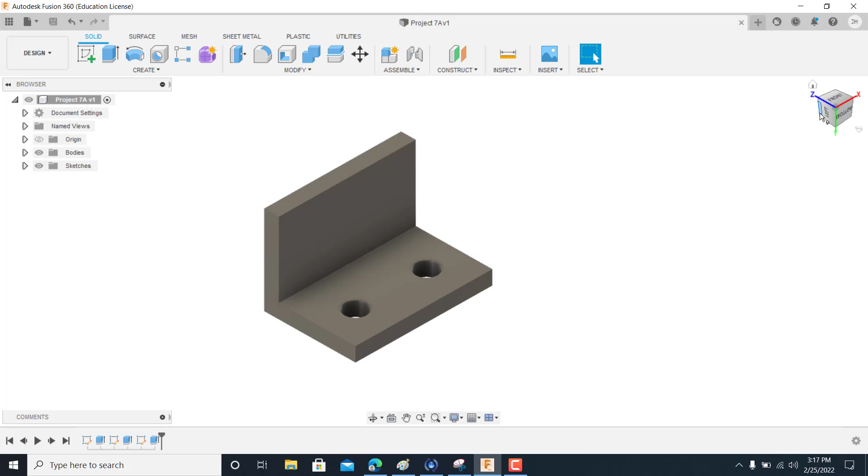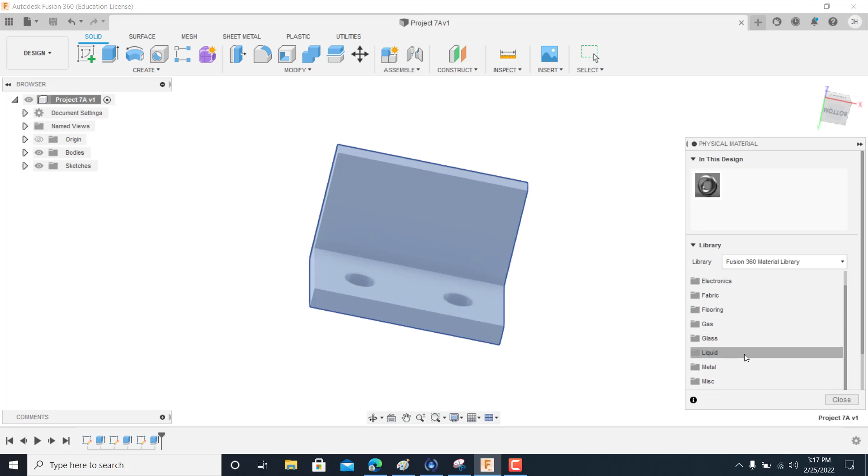First thing I want to do is make this one just out of ABS plastic, okay? So I just come up here and right click on Project 7A. That's what I've called it after I saved it. And we'll come down here to physical material. And in this part is where I go in and I find my ABS plastic, and put it right over top of that. And that is there. I want to hit save. Okay.

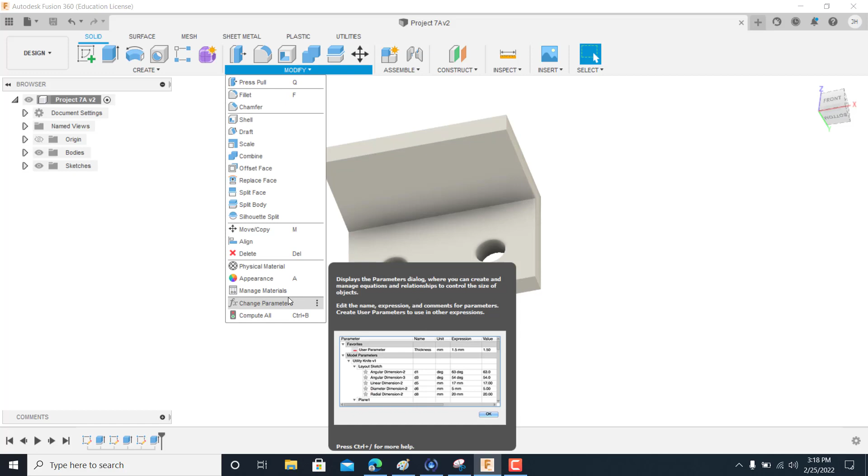Now, anytime you make an update to your project, let's say for instance you had done an analysis on this and it didn't withstand the pressure, and you want to change the material on it, you'll have to come up here and hit modify. Well, I didn't make enough of a change on it to do an update, but go ahead and hit compute all. That works with our analysis here in simulation. So anything you do, you need to hit compute all to change it, okay? It just changes the parameters in the design.

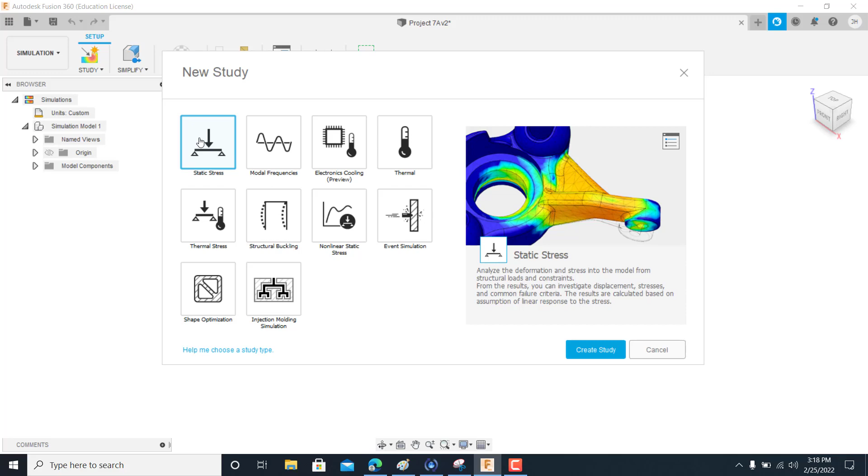So now I want to switch from my design over here on the left down to simulation. And inside here, we're going to just do static stress. That's all we're working with is statics. And on this part, I'm going to put some pressure on it, okay? But first, I'm going to lock it down. So I got the material. The first thing's taken care of. The next thing is to come in here and put a constraint on it.

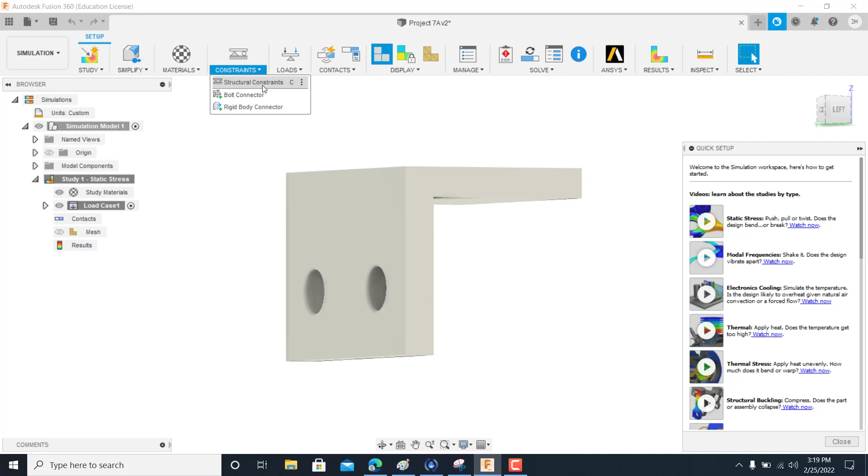So go to structural constraints. Now, you've got different ones. We could use pin if you wanted to, and I'll show you that. You just come in here and it's like it's pinned. Now, if you put that pin constraint in there, it won't move from side to side, but it will rotate. Okay, if you put another pin in it, it won't rotate.

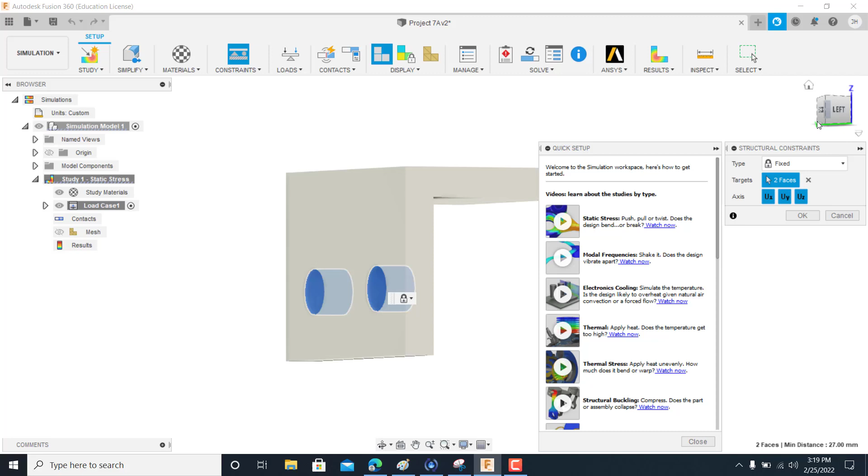But for what I'm going to do, I want to do fixed. Okay, on both of those, I just want to constrain it straight in. And let me cancel that out. Let's see if that's stuck.

All right. So to tell what's going on, this is study 1 that we've started out with. And loads constraints. So no, it didn't save my constraint. So I've got to go back in there and do it again. I'm just going to use a fixed constraint, and I'll click on that, and then I'll click on this one, and then you have to hit OK on that.

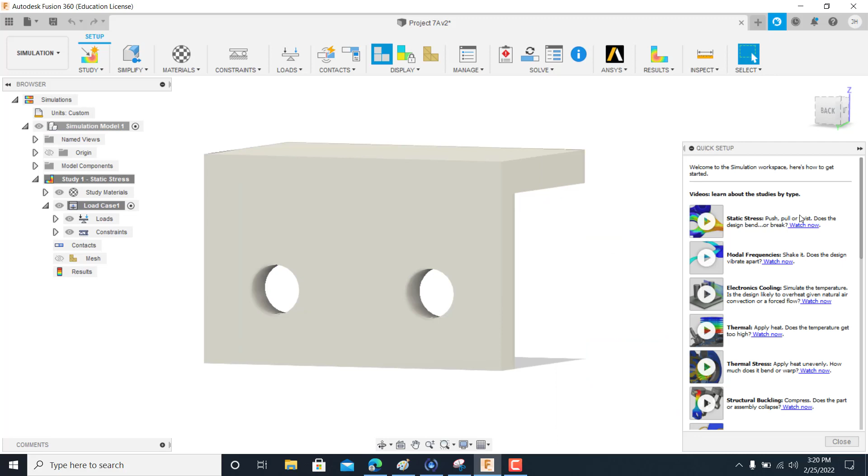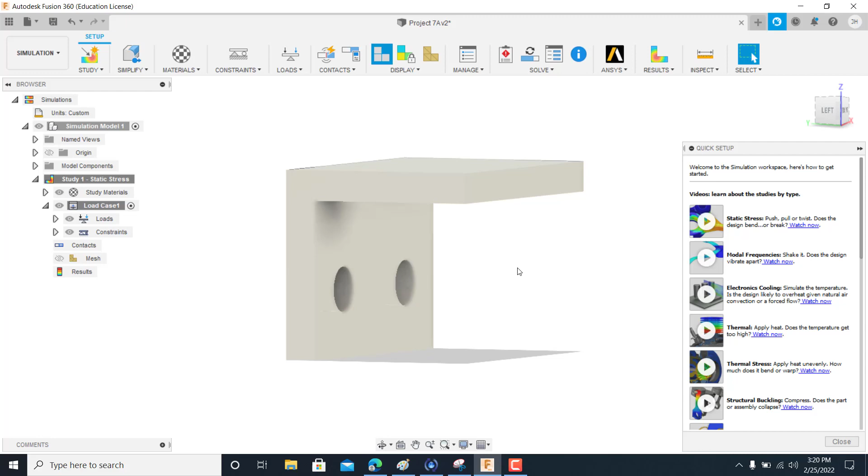So my constraints, I'm locked. Y'all see that? So I'm locked. And the reason I wanted that is I just didn't want this thing to uplift as it's being pushed on, okay? Now, the next project you do in 7B, you will be using pins in that, okay? So that's how you do the differences in them.

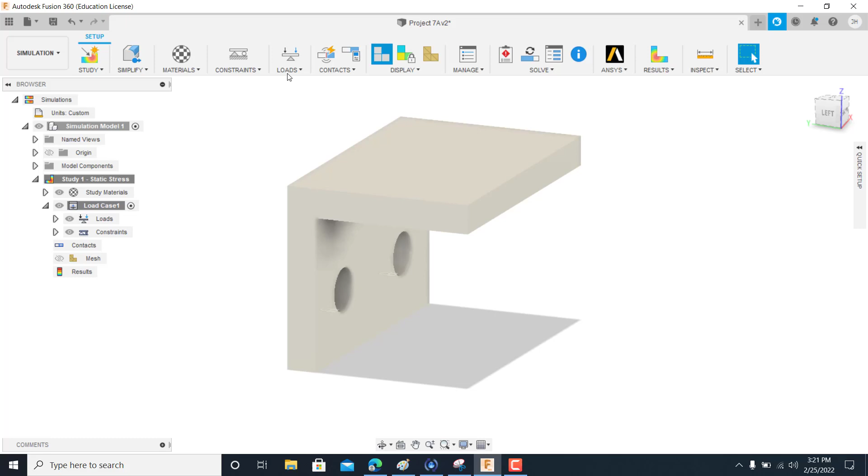So now, with that done, let's put a force on this. We're going to put 1,200 newtons on this, which is equivalent to about, you did the calculations the other day. What was it, around 270? I'm just guessing, around 270 pounds. So we're going to put about 1,200 newtons on this, and it's right here in loads, structural loads. All I do is hit the face of this and put 1,200, and OK.

Y'all see that? So this thing is all ready. You all see it over here. I've got my loads. If you right click it, everything should be, if I click on this, you can see the force. I can edit it by clicking on it anytime I want. Same thing down here with constraints. I can click on it and I can change those at any time. So that's the beauty of using parametric modeling software.

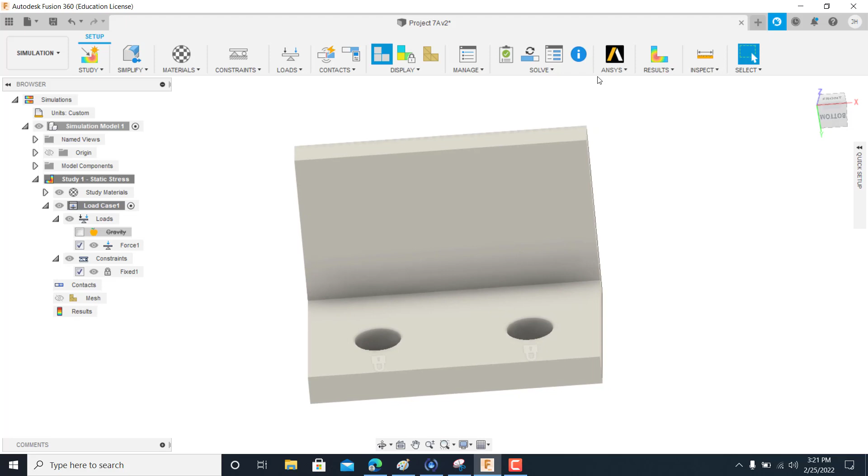So we are ready. Come up here and check and make sure you got everything correct. The study setup has all the information required, and when it does that, I can go over here, results, structural results. Well, I could have hit analysis there too, but I hit yes, and I'm going to solve here for this, okay? So let's see what's going to happen, all right?

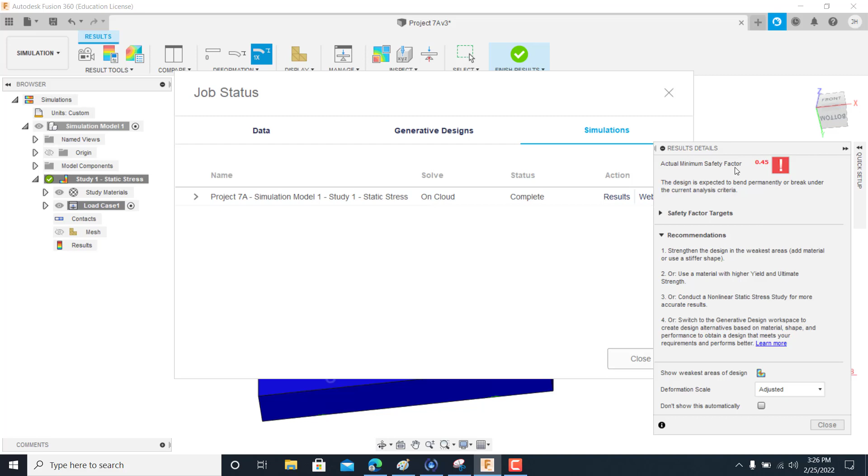Okay, the study is complete, and if you look, I got a 0.45. I'm in the red, so there's something that happened. Oh, wow. Check it out. Like I said, you don't want a whole lot of blue, but you don't want red, and you don't want a lot of yellow. You want to be more around the green to yellow, a little yellow, but you don't want a whole lot of blue.

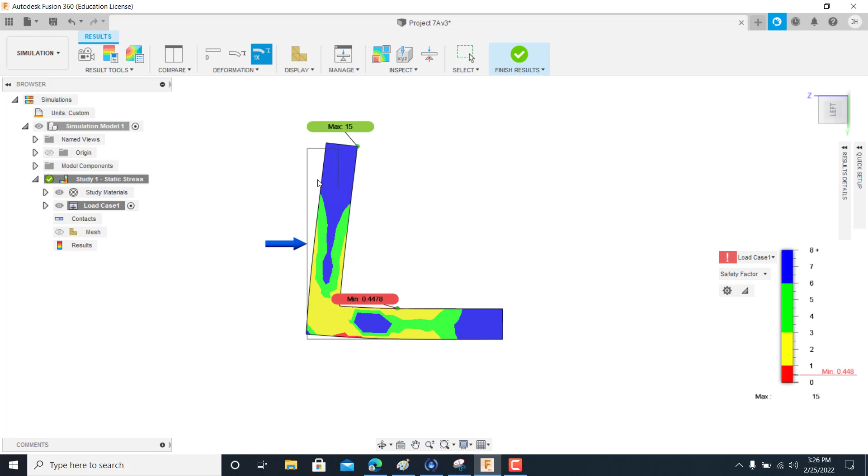But you're noticing this. Check this out. That pressure is being applied. Look how much this is bending from the pressure. And ultimately, when it gets to that point right there, it's done, okay? It's going to fail. So right here we see some major problems. And like I said, you need to be up close to around that 3 mark, okay? That's where we like to be.

So what we're going to do is we've got to go in and redesign this thing. We're trying to cut out a lot of material that we don't need, like this blue section up here. And down here, we don't need all this blue. But there is a requirement for length out here, but we could cut into it. We can cut into this too. We could add a few stiffeners in here for this little section. A fillet would be great right here, and maybe some extra material here. Whatever you see fit to make this thing better, that's what we've got to do.

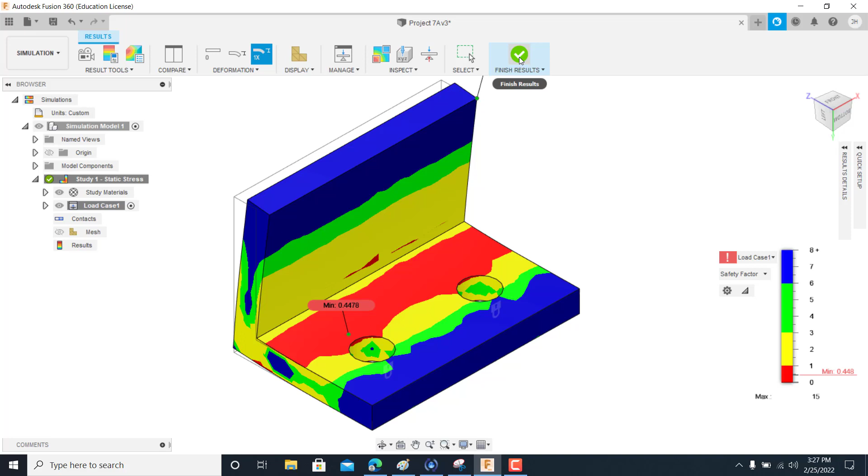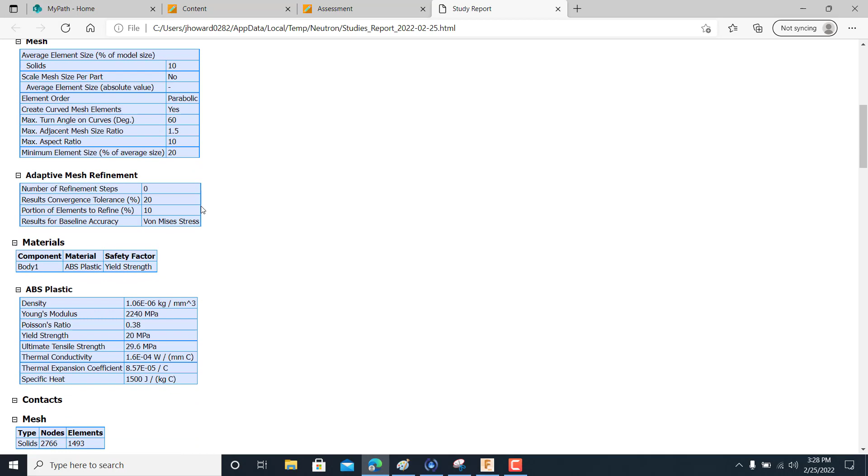So I want to finish the result, and also I want to go back to the study right here, and I can look at the report. Right here it is. And I want to look at the report, and this is what I want you guys to take some snipping pictures for me. Take a couple pictures. One of them, I want you guys to make sure that you show me your material.

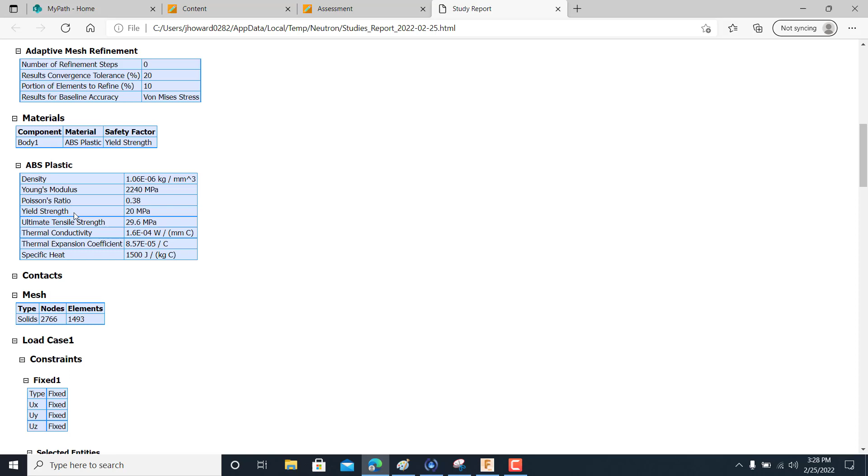See, I'm using ABS plastic, and the yield strength's 20 MPa, and my tensile strength, the ultimate strength, is 29.6, and I misspoke a few minutes ago, but the yield strength is probably what we have this thing set to fail. And basically, you never want to go past your yield strength on anything you design. So 20 megapascals is what that is.

And you come down here, this is how we had it fixed in. This is the pressure that's being applied to it. We come down here, and the displacement. This is how much this part moved at the top end.

So it's moving a little over 5 millimeters. Y'all see that? Mostly in that z-axis that we were pushing on it. And what that means is 5 millimeters.

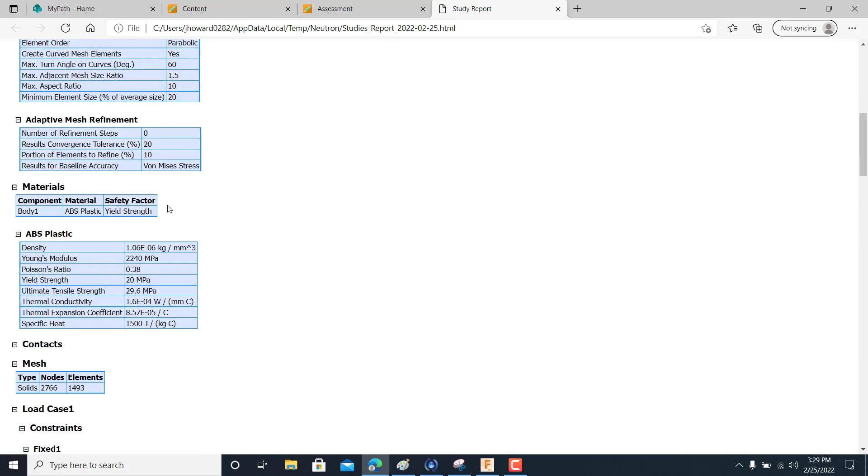Let's get a good shot of it. Let's go back to our drawing here just a minute. Anyways, it would be from the point of natural, the part just set naturally, to the furthest point that it's being forced, the movement, it's 5 millimeters. So that's your displacement, and we'll look at that in just a minute.

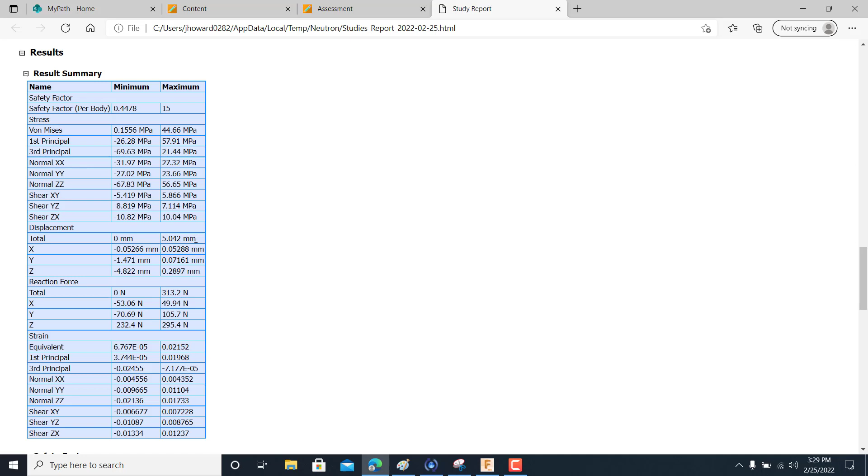The reaction forces here, wow, y'all see all this, the strain, all of it's in here, and you're looking at some major numbers in here. It's a lot more than what my part could handle, and you all can see it.

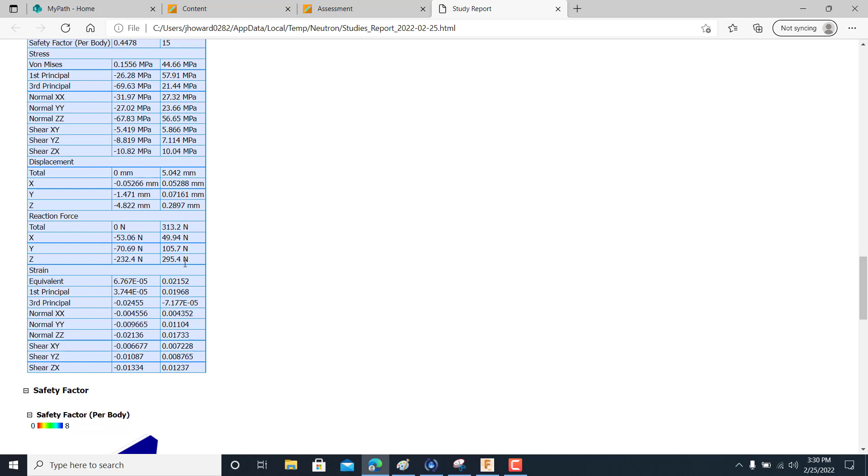And again, right here would be the displacement. Right there on that point of the natural state of the part to the same point after the force has been applied. Okay? And that's what you're getting at.

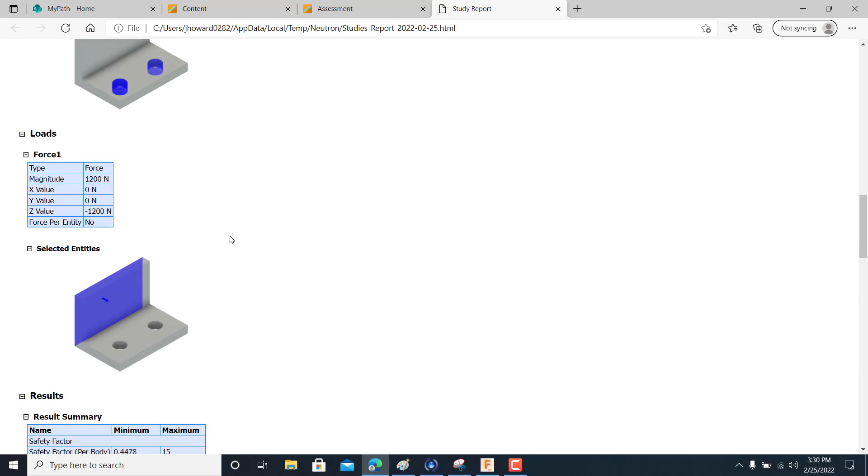And you've got all kinds of cool things here to study and to look at. So again, I want you to take and make some pictures and add that to your submission forms before you turn it in. But I've got to do some work on this thing to make it right.

Let's go in and see what we can do. I don't want to change material. That's the last thing I want to do. In additive manufacturing, you're trying to make the part as simplistic as you can, and it can be very, very complex because you can make it with this technology. So you don't need to just add another material to it to withstand that.

We could make that out of steel and it would have withstood that. But I want to make it out of a plastic, and I want to design it so it can withstand that pressure. So let's go back up to design, take a look at it, and I want to add myself a fillet, a nice little fillet here, and I'll click on this line there.

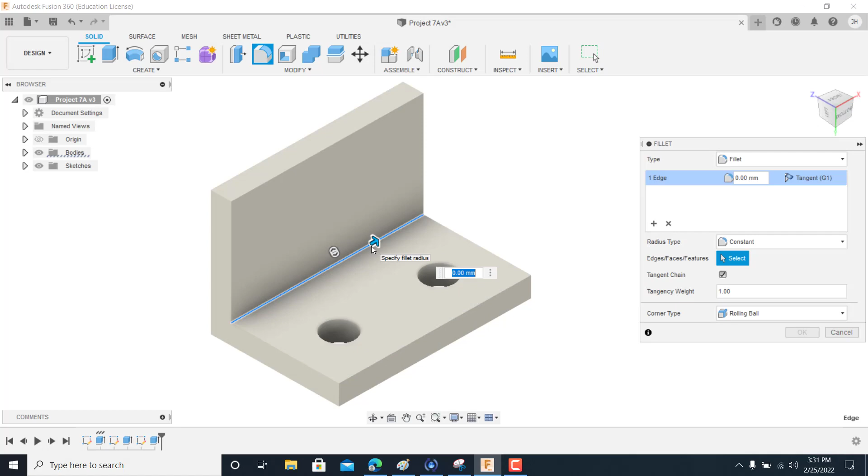And what kind of fillet do I want? Let's see, maybe about 15. That might be too much. That might interfere with something. Let's go about 10, okay? That'll make a lot of difference there.

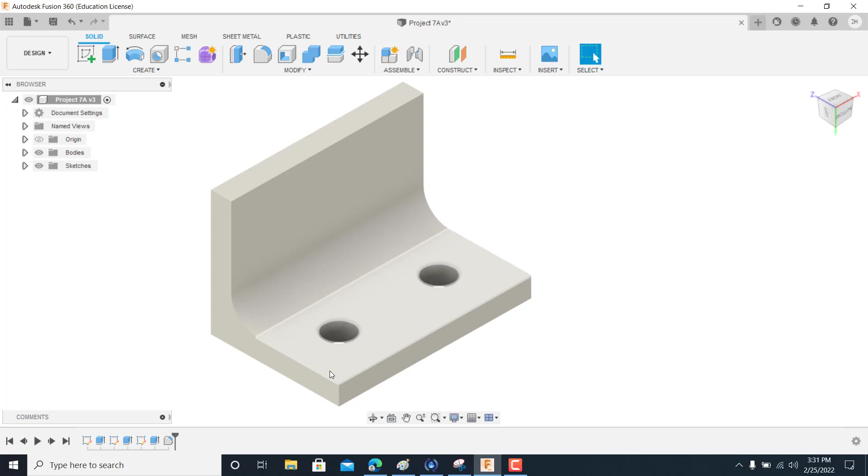Now again, remember this all up here was in the blue, so it was no real heavy stress at all in this section and this. So what I'll do, I want to make myself a sketch here. Well, before I do that, let's do this. Let me go back. I can just hit undo a couple times.

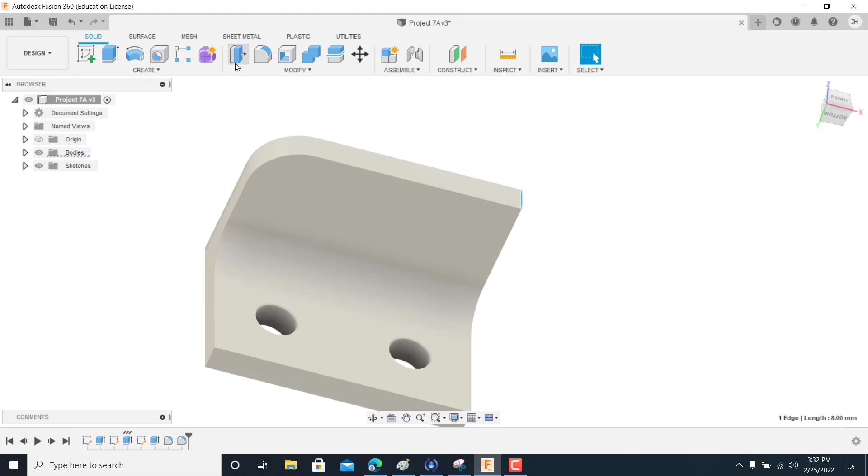I'm going to put a fillet up here on the top portion of this. Alright, we'll put a fillet there. We'll put 15. Why not put another one on the other side, 15?

And again, this thing has to be that tall. So I want to do this. I want to come in here. I'm going to just do some crazy design. Just come down a little bit. Or it might be better off if I done like an arc, like a 3-point arc.

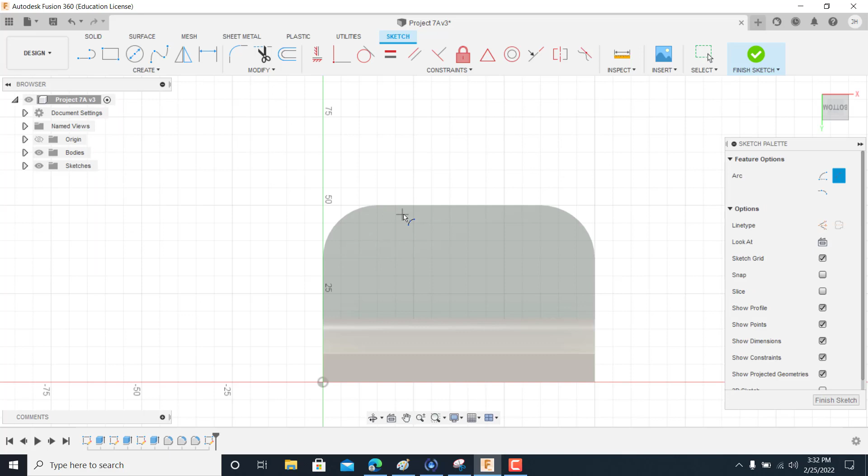I catch that point to that point. That'd give me the height. I come down just a fuzz like that. And I'll extrude that out.

Okay, and then just to clean it up, you can put some fillets on this thing. Like, oh, I didn't want to do that much. 5. Do the same thing over here, fillet of 5. Perfect.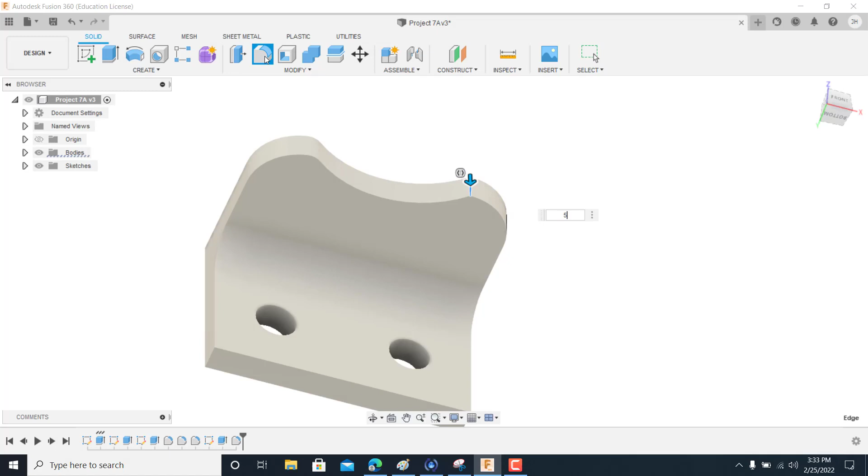Alright, looks kind of crazy, doesn't it? Now, what else? Down here at the bottom, we could actually do something like that. Click on this, and this is your all's design. I want you guys to design it however you want, just to make this thing work so that we can get it above that safety measure of 3.

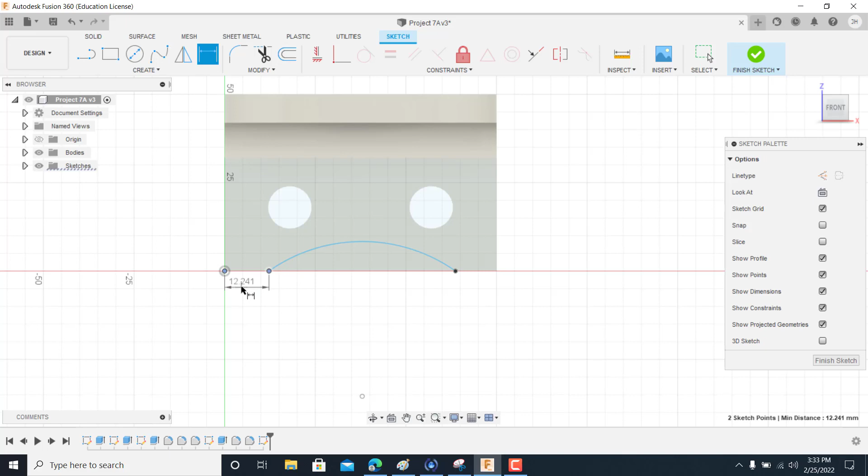And I'll come in here and put another one in, something like that. But what I got to do too, make sure we're concentric here. I'll do 12, and I'll do 12. Finish the sketch out. I'll extrude this piece out all the way.

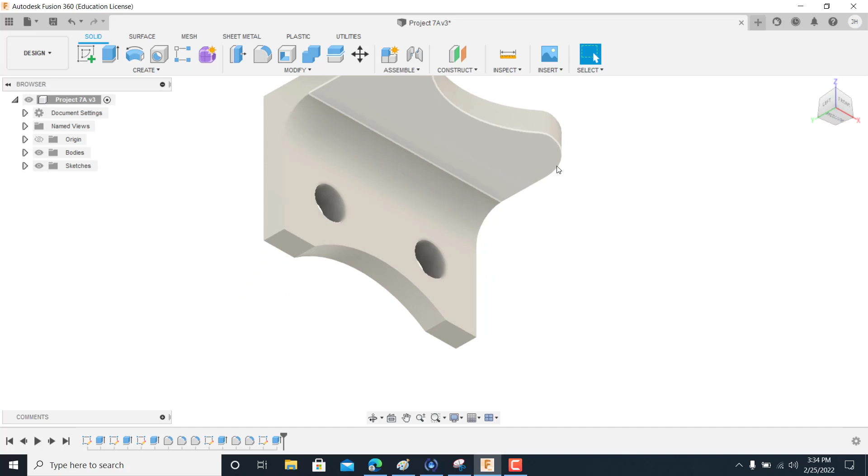Alright, and you know what else I want to put? I want to put a rib in here, like a stiffener. So it's not going to add a whole lot of material. I don't want to put too much material in, but I'll come up here to construct, and I'll do a mid-plane. I'll catch that, and okay.

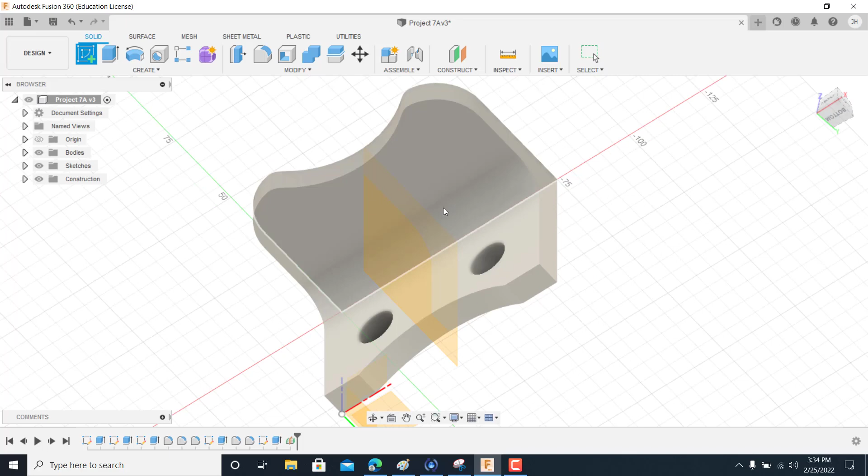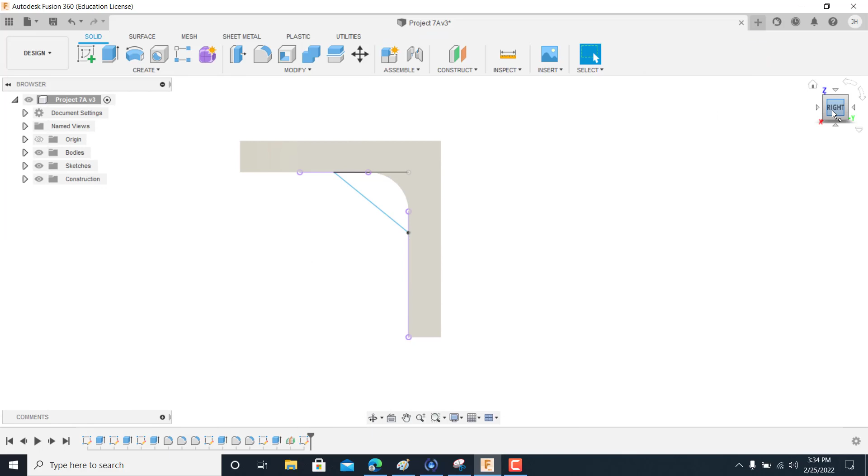And now I want to do a sketch on that plane. I'm just going to come in here a little ways, and I've got to project that geometry up. So just come in here, project. There, and there. I don't want to add too much material, guys, just a little bit. I'm going to bring that back in there so it all ties in together. Finish that out, and extrude.

And undoubtedly I didn't catch everything, so I need to go back in there to my sketch, double click it. And that's what happened. Trim.

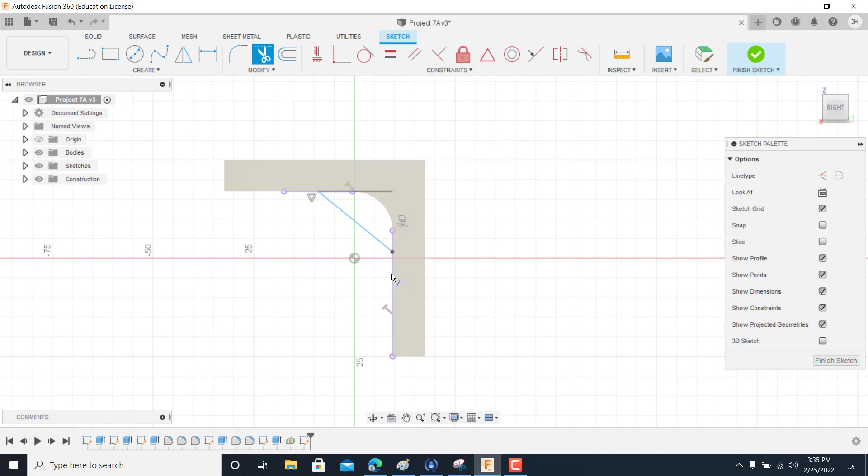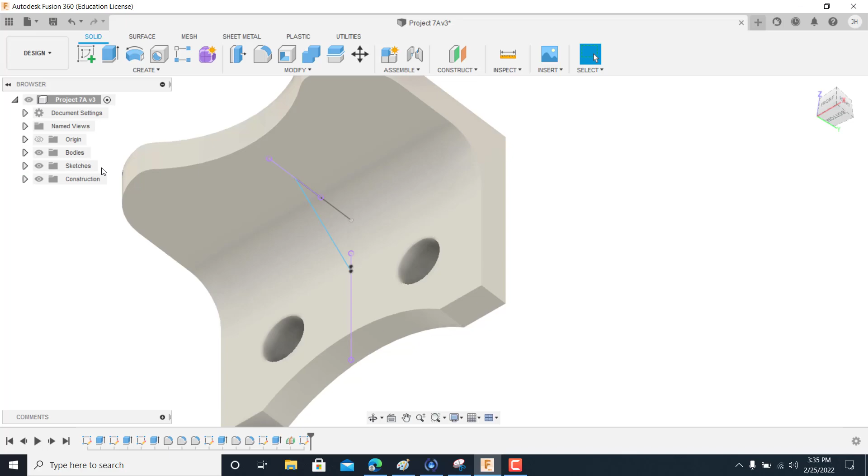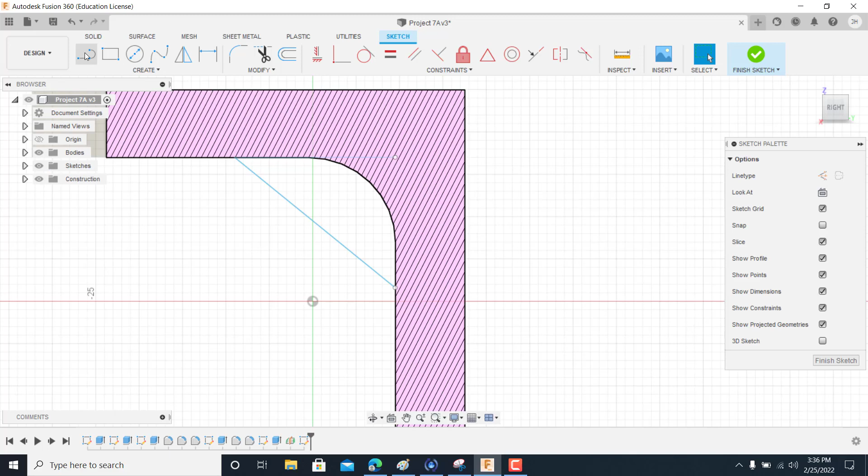Double click, and I want to go in here and slice so I can see what's going on. I want to delete that line out now, delete that line out, delete that one. Let's see what's going on with this thing. There we go, got that line in. Delete that line out, and I'll put those two in, finish my sketch up.

And now I think we've got something. There it is, beautiful, 2 sides. I'll do 2.5 on one side, 2.5 on another. And that looks great. See what I done?

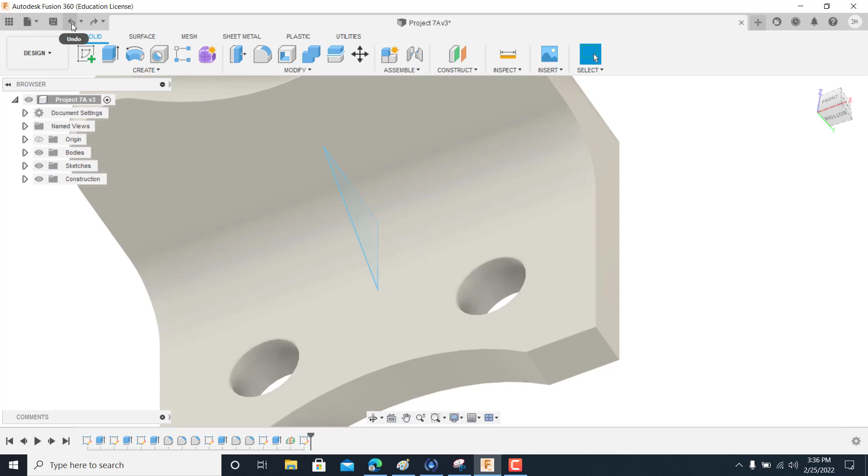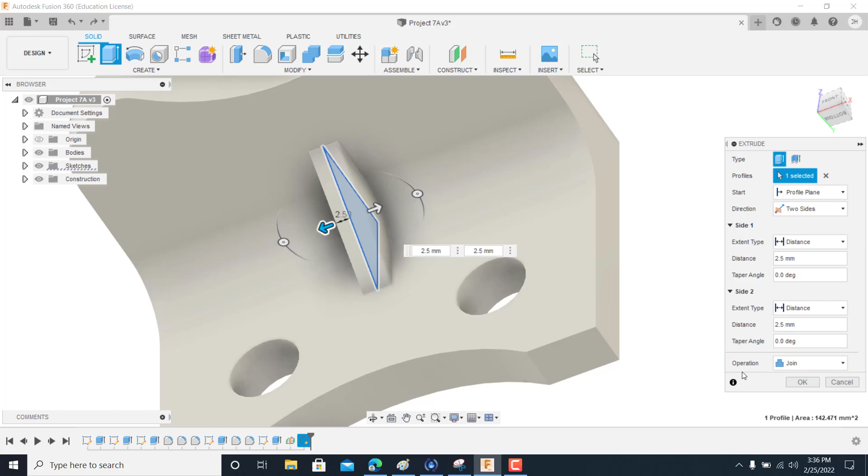Go back. 2 sides, and make sure that you're not cutting it, but you're actually joining it. Do 2.5, 2.5, and make sure you're not cutting it, but you're joining it right here at the bottom. Okay, if you want to do, now this is your design, however you feel.

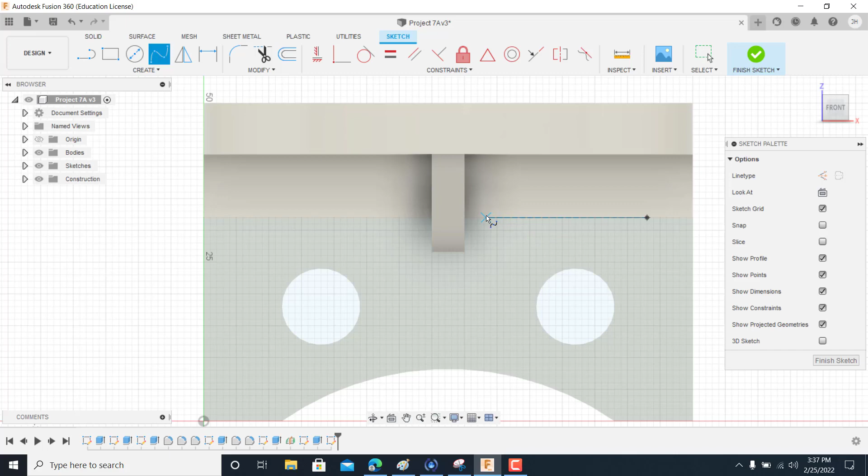And also I want to put a little bit more material. Right here was the real rough zone, so I'm just guesstimating what I need to do here. I'm going to use a spline, and what I'll do is start about right here, bring that right across here like that. I don't want to add in too much material.

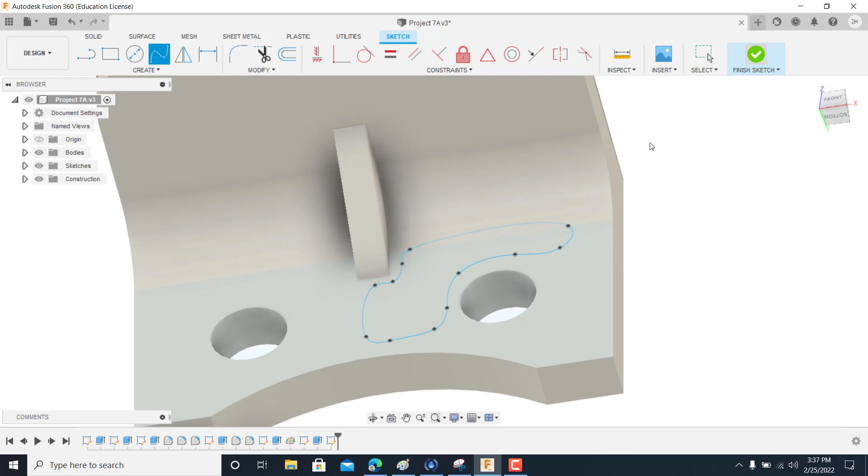I'll cut that right down through here, start turning it about right there, and I'm just going to thicken this up a little bit through there. Okay, so finish that sketch out, extrude. I'll extrude it about 1 millimeter.

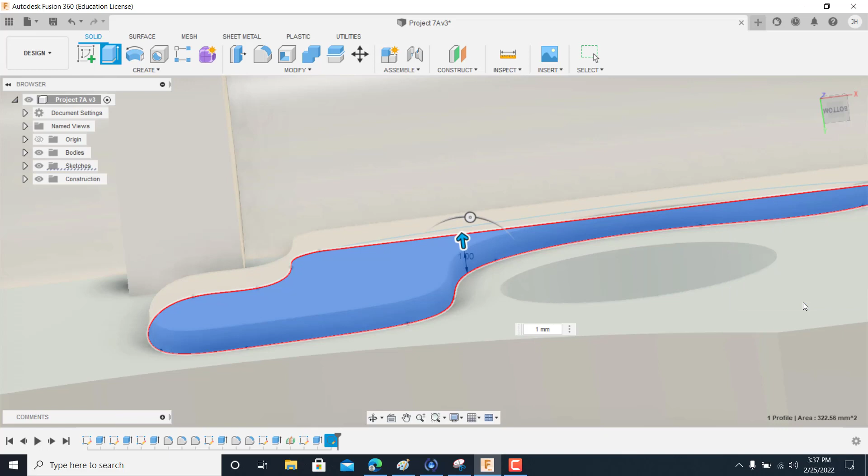All right, I might put a taper on it, about a 10 degree taper on it. Let's see what that looks like. I put it the wrong way, be a -10. -10, that looks good. So what I want to do is put it on the other side. The reason I only done one side is to keep it symmetrical.

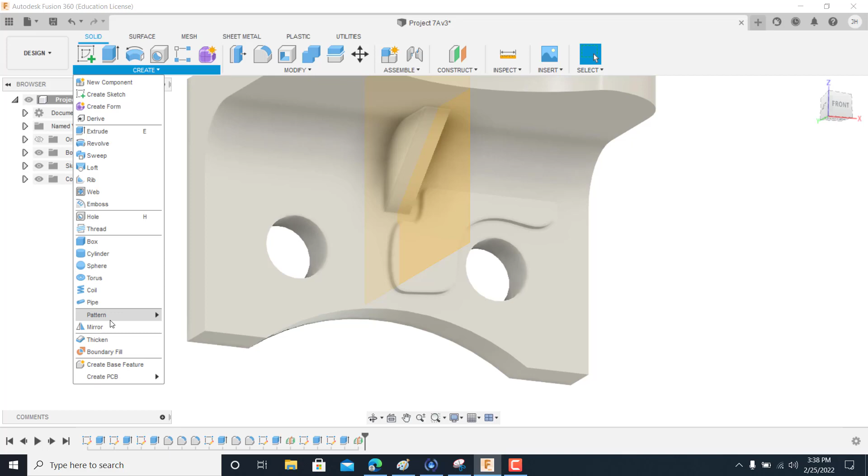So again, I want to put in another mid plane. I'll catch that. Into that, I got me a plane. And now I can use my mirroring tool, go in here, it's right here in create mirror. And I want to catch that. See, I'm clicking on it down there. I could have clicked it up here too. My mirror plane is this guy right there, and then OK.

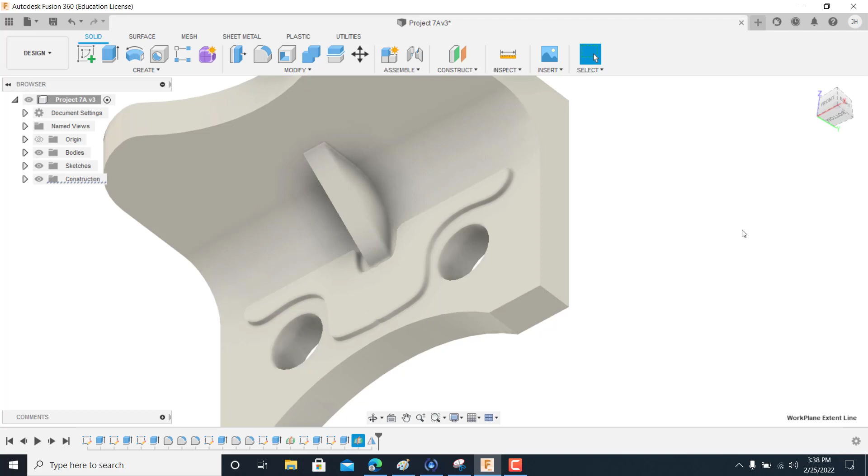It all blends together. Oh yeah, it looks good. So I've got all of this done, and I just hid my plane there. So now let's see how this thing holds up. Okay, and then we can do more modifications after this.

So I want to go in, and like I said, after you get done, you have to hit modify, compute all.

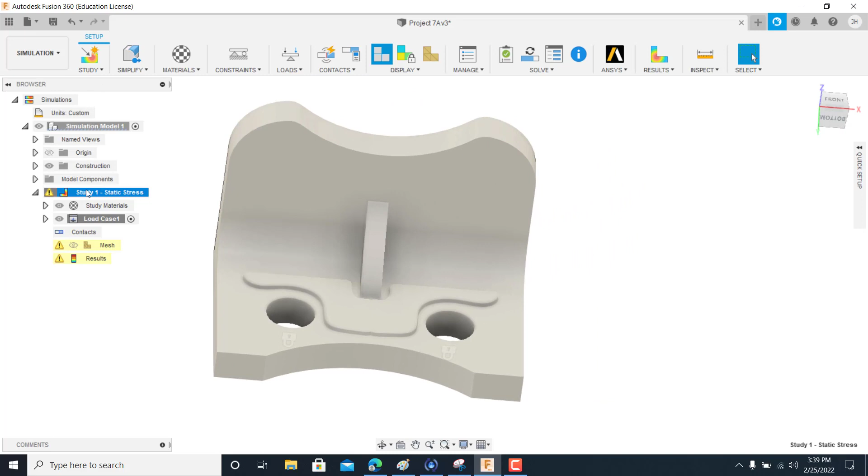Okay, let's go down here to simulation. And I want to do another study. This is study 1, the first one I did. This is study 2, the new one. And you got to go back, create another study. You got to go in and put your constraints on again. And we did this one like that, and then OK.

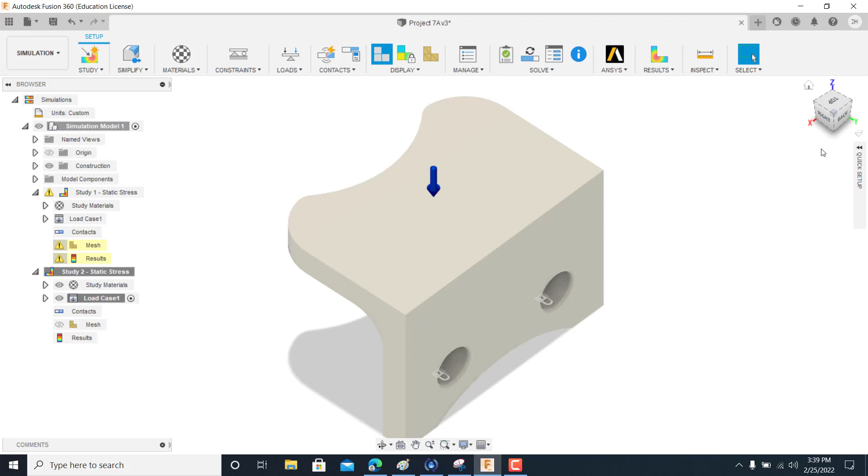And then I want to put my forces on, loads. Right here on the back of this, 1200 newtons. And that should be everything. It's still the same material, we didn't change that. I want to check and see what this is like. Perfect.

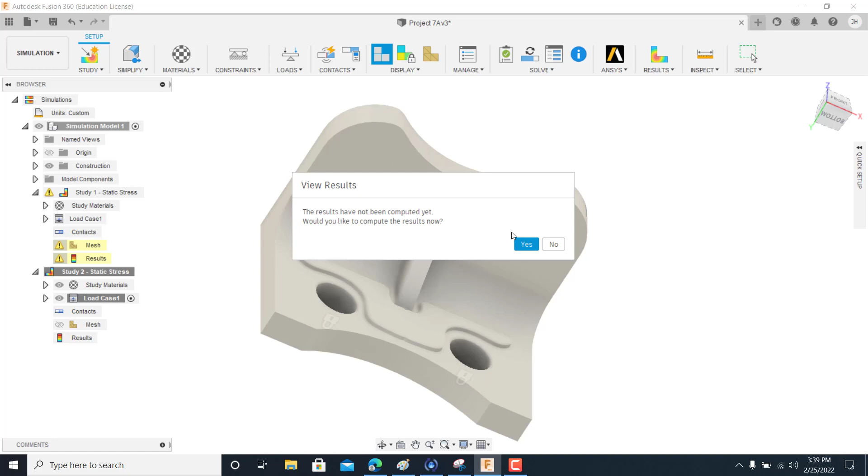And now let's go over here and hit simulation results. All right, and I always hit that, but I mean, I could come over here and hit these other. You go to analysis and all that good stuff, but I'm just going to hit my simulation results. Yes, I wanted to do one, and I want it to solve. And right here is solve as well.

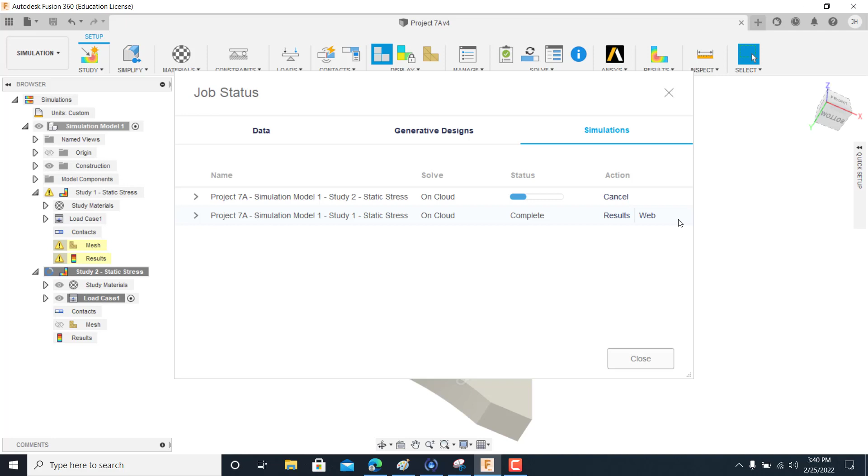So it is doing its study right now. It will get back to me. It takes, like I said, sometimes 1 or 2 minutes, sometimes it takes more. But right now we've got it set up just on standard mesh. And like I said, the more detail you put into a print, the more you need to refine and make a smaller triangulation mesh so it's a little bit more accurate. And I'll show you that when this finishes up here.

Alright, the results are in, and this is the second study, let's see what happened here, what's going on.

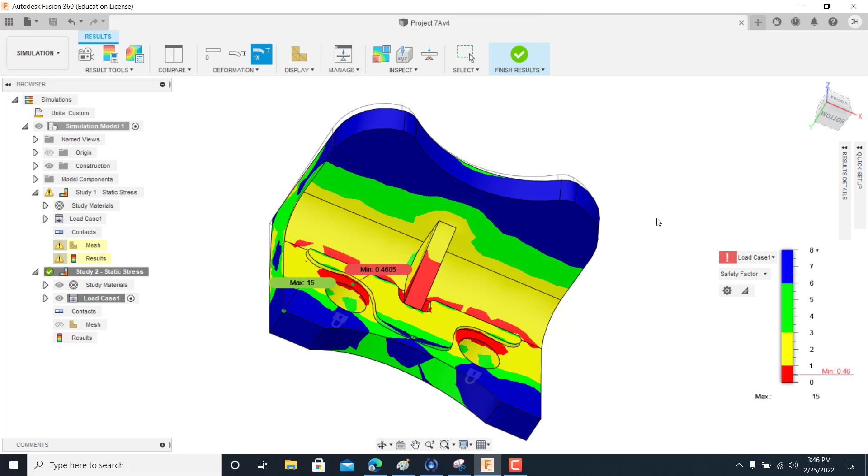As you all can see, I'm getting closer, a lot closer. There's a few areas that still are in the red, like this area right here, it's ready to bust out. Any part that you have the red, it's ready to pass its yield strength, and that's why it doesn't matter about the rest of the part.

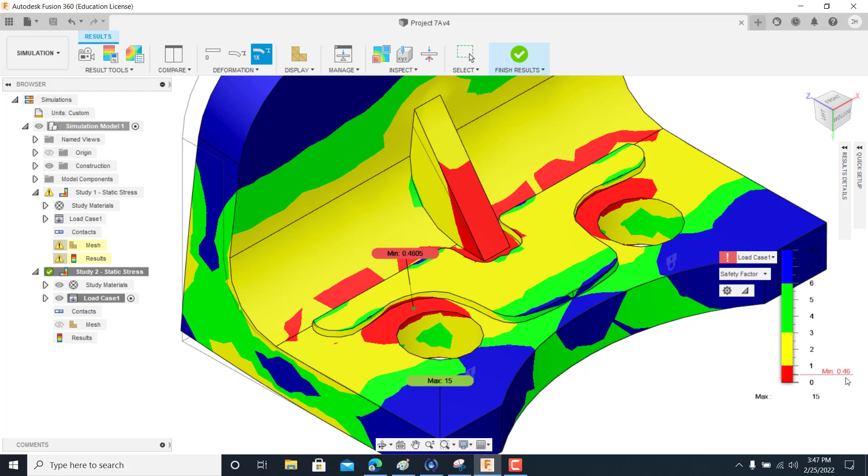Now sometimes you'll have a little bit of red, like little spots, it doesn't really mean anything. But at 0.46, there's still issues with this part, and you still see some blue.

Now this is looking better on this other side over here. Maybe we can put a fillet over here to cut back some material. Up here at the top, we can alleviate some more of this blue area. But the problem is right here in our red zone, we've got to stiffen this up a bit more, maybe add a little bit more thickness to this or something along those lines.

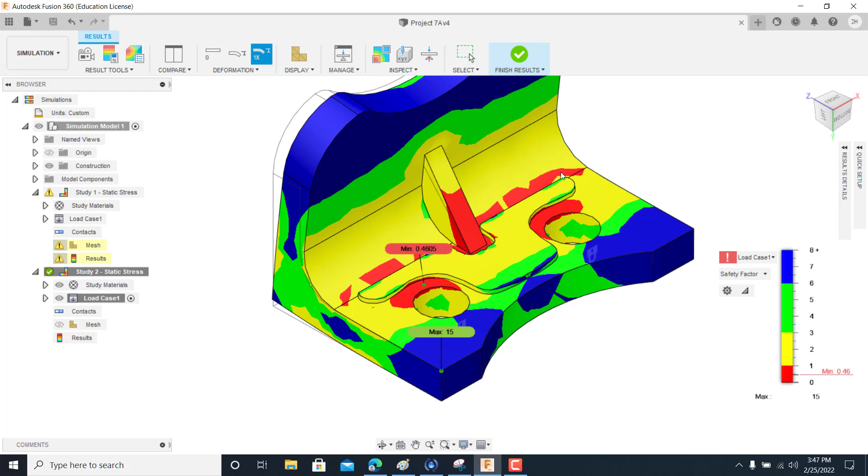But it's giving us an idea of where we're at with this thing. And you can see here, look at the force, look how much displacement.

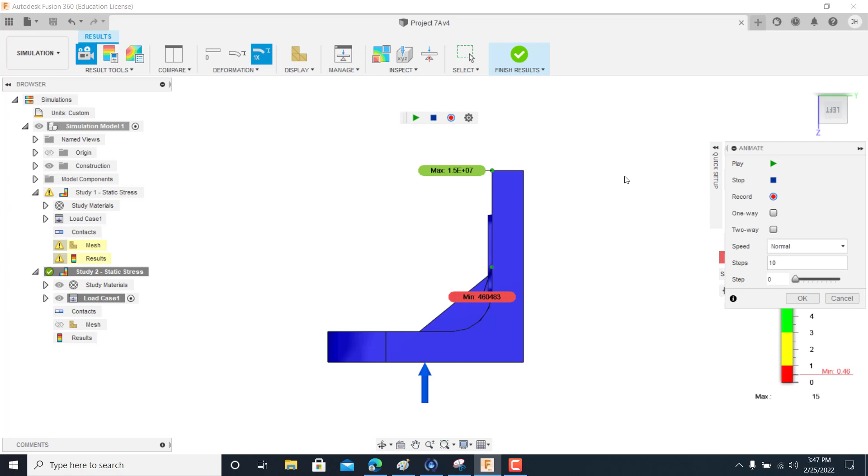If we go in there and look at the results, here of course is your animation, you all remember that, we done that before. But we can turn it, and as the pressure is applied to this, you can watch the animation. You can make a video of it too.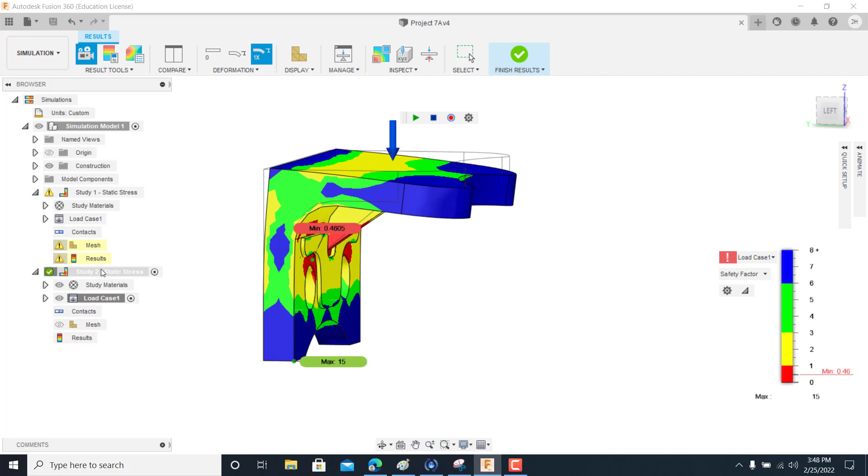Now, if we want to look at our results, we can look at a report right here. You can also look at your report down here, in your study. There should be a place for your report. But we're going to preview it.

We come down through here, and of course, you'll see all the information. Once you guys get this to about a 3, I'm looking for about a 3 on that. Then I want you to take pictures of everything, and then come in here and take pictures of your results, okay?

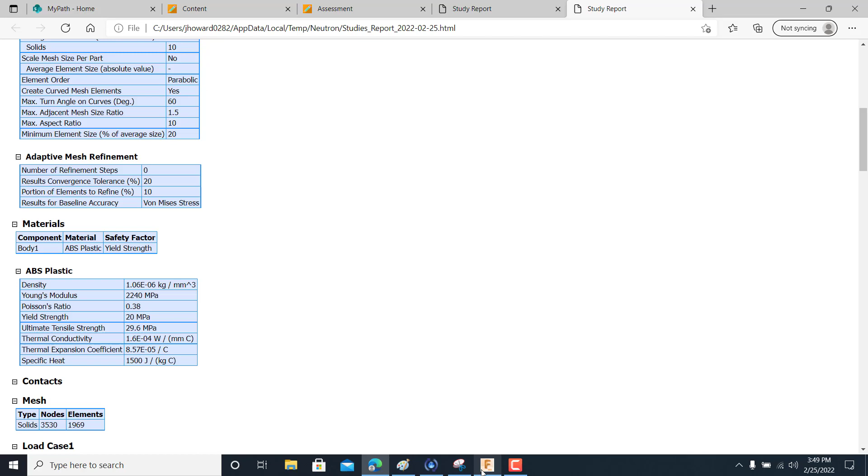But now let's go back to our drawing. I'm finished with my results, okay? Now you can go back to those results at any time. You've got 2 different studies here, y'all see that? There's 2 different studies. You can get in there, right click, and go to the report and look at all that.

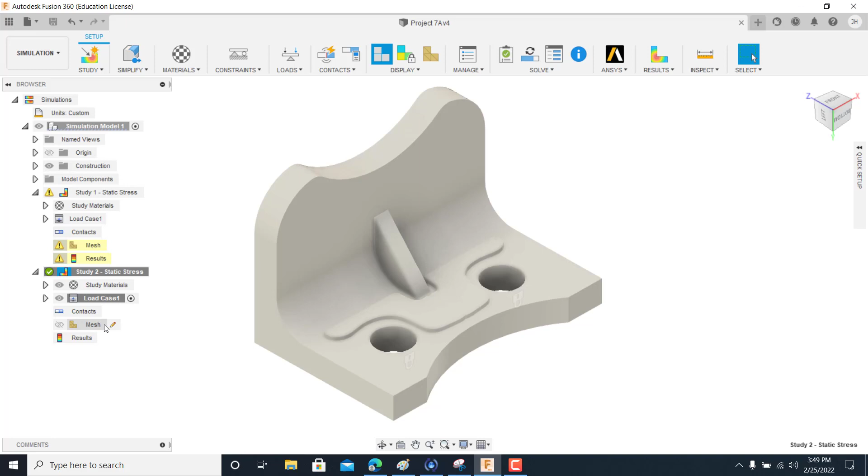But now I want to show you all too, here's that mesh I was talking about. If you edit it, if I come in here and go about halfway, well, before I do that, if I right click and go generate mesh, it'll show you the mesh, the triangulation of this part. This is how it's triangulated right now, which is good.

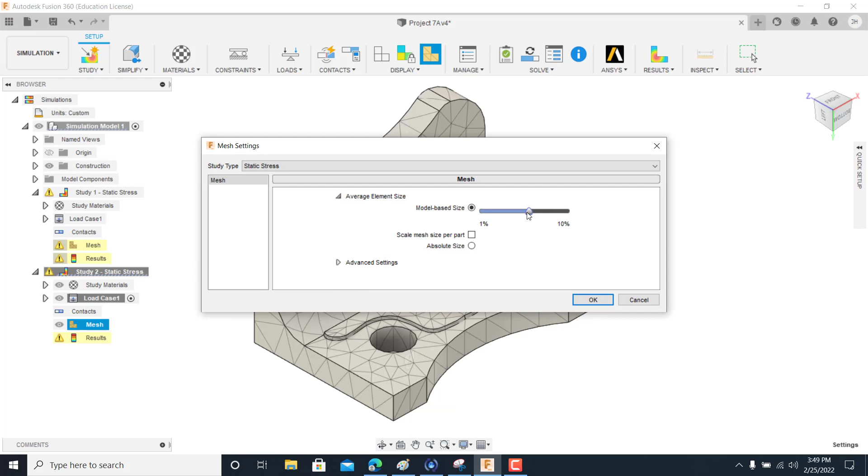If I go in here and edit it and go about 5%, somewhere in that neighborhood, maybe a little less, and then right click and generate the mesh with a smaller density, you all see that? That will be your mesh, and that's how it's going to calculate. It's going to take a lot more time, but especially for really fine details, it does a better job getting the calculations pretty close.

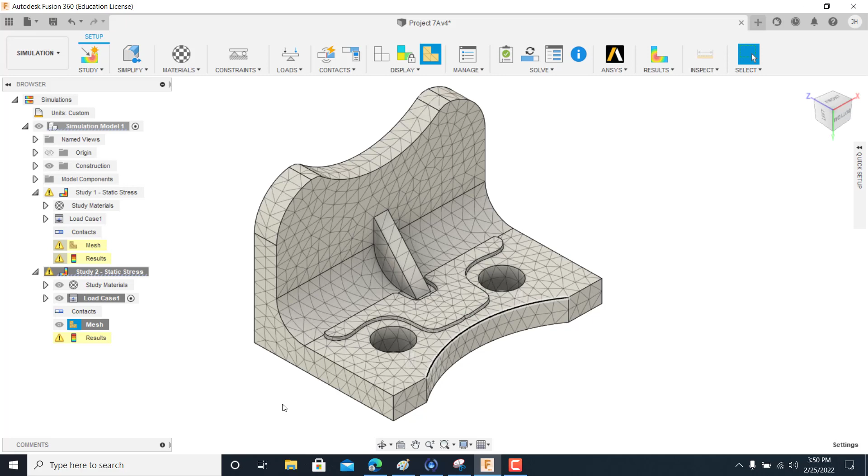So folks, what I want you to do is take your design, like I said, and start cutting away at this, cutting and carving and adding. There's no rhyme or reason, it doesn't have to be pretty, but it just has to work, okay? That's the main thing. And again, I want your guys' results to be right around that 3 range right here.

Now it could be just a little under, it could be a little over, but I like to see some greens. I just don't want to overbuild this thing, and I don't want to see a whole lot of yellows, and I surely don't want to see red. So try to keep it between the green and the yellow the best you can. And if you can get it around 3 for your safety factor, you've done well.

So it's a good project. Get in there, get working on it. If you need my help, just let me know.